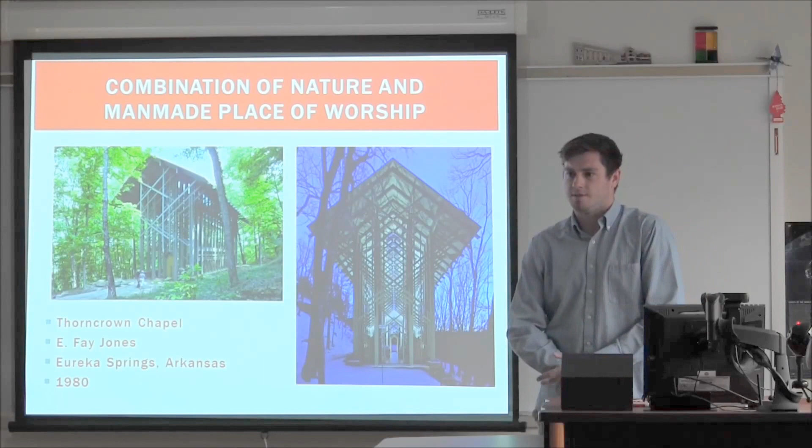For my modern adaptation on an ancient sacred space, I was really interested in the Parthenon in Athens, Greece. I wrote a paper on this before and learned a lot about it. I was impressed with how the space is also a combination of the beauty of nature and a temple, but maybe not intentionally. This is just a large, impressive temple, and I wanted to make a modernized version that was more this century, and I wanted to include sustainability with it too.

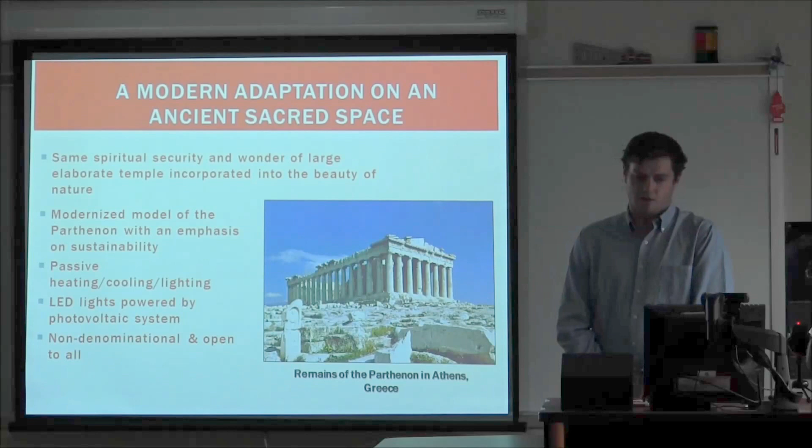So I included passive heating, cooling, and lighting, and there would also be an LED-powered photovoltaic system, or LED lights for nighttime, or when it's not so sunny and the passive heating won't work. Those would be powered by a PV system located on the roof.

They really focused on the golden ratio, which they called the number phi, 1.618. So all of the widths to the heights, everything - that's the ratio of the width to the height of the whole thing, and even down into the details, like the space between each of those little columns, everything seems to follow this ratio. They were really very particular and exact, which is impressive for the time period.

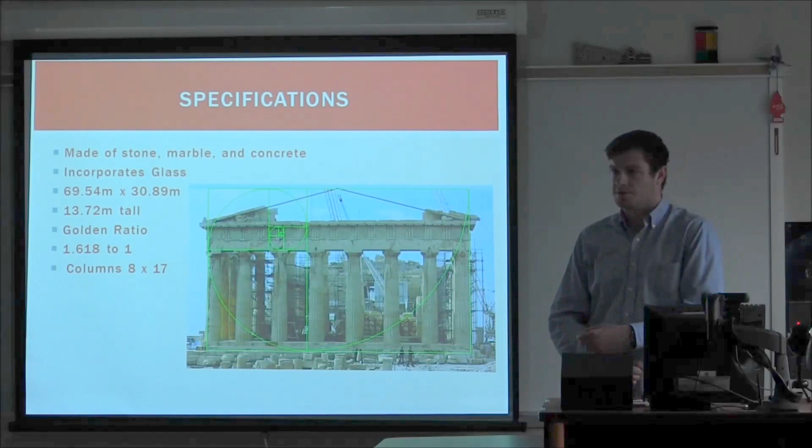They also went by a strict rule with the columns of the building. So this is the width of it, you would see 8 columns, and down the stretch would be 17, which the corner columns share - it's the 8th and the 17th.

The Parthenon is also located on this plateau, which I think is what really incorporated it into nature and the beauty around it. But I guess the purpose for that was mostly protection. So it was raised, and the Parthenon was located in the Acropolis, which literally translates as high city.

There were other structures within there for the people of Athens to use. It would also serve as protection - if they were being invaded or thought they were being attacked, the towns surrounding the Acropolis would all move up, and they could block themselves away up in the Acropolis.

Also, the purpose for it being raised, I believe, is it's a place of worship. There are temples and statues and many buildings dedicated to the gods, and when an area is raised, it's closer to the heavens. So for this new sacred space, I wanted to keep it elevated for the same purpose - closer to the heavens, and also incorporated into nature, keeping it nice in the area it's in, and really have it stand out and be something significant.

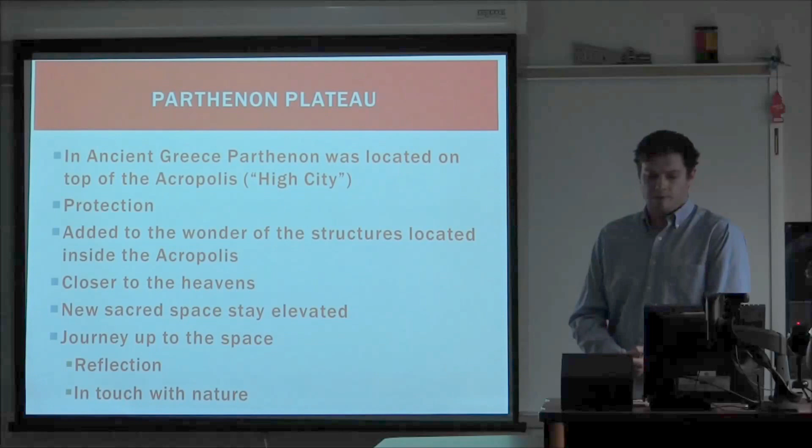Also, you see my structure - there's also, to get up to it, there'd be a journey to the space, which would really provide for, I think, getting in touch with nature on the way to your destination, and would maybe provide some time for meditation and reflection.

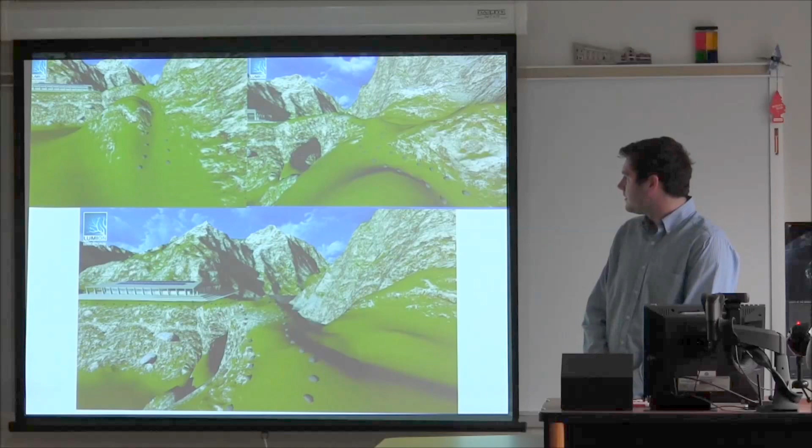So here's the path - over inside you can see the design of the sacred space I created. There would be a lined path sort of up into the mountains to get to the destination.

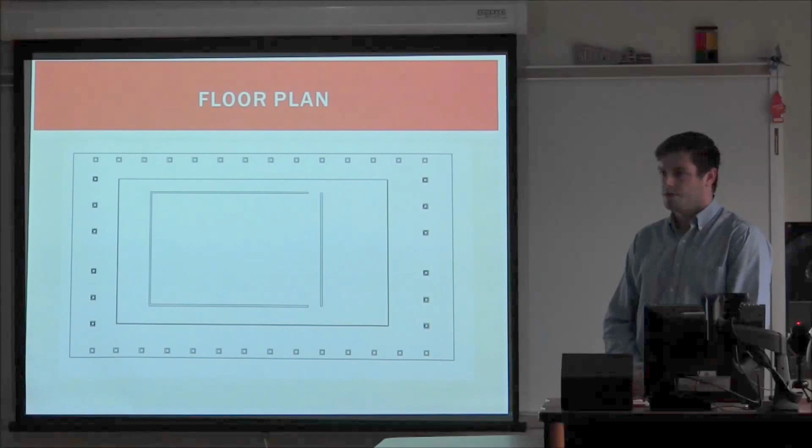And then here's a floor plan of the space itself. This outer box, or the middle box, would be like a glass wall curtain, which would allow you to be either outside under the overhanging roof or inside there if you wanted to, depending on your wants and needs. So the light would easily access that place, but you'd still be inside, sort of.

And then there would be another room inside for more, I guess, if you wanted to keep yourself focused and really wanted to focus on what you wanted to - since it's non-denominational, so if you wanted to pray or just meditate or whatever you want. And that's how the Parthenon actually was. They had separate rooms inside, sort of similar to that for different areas, with statues in different locations.

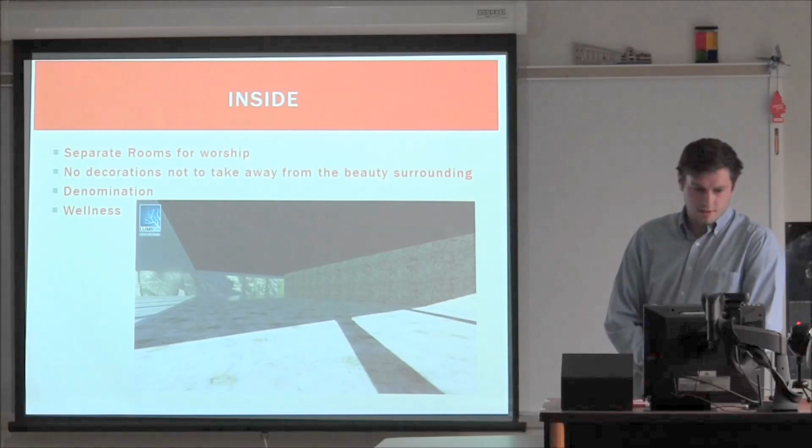So here's sort of the inside. You could be inside and still see out through the glass and appreciate the area around it. So this would be, if in the winter it was too cold to actually be outside of the area, you could go inside the sliding glass curtain and then be protected from the elements, but still be able to appreciate nature. There's not much decoration, like statues and stuff, as the Parthenon would have, because as I said, it would be open to all, and just a place to incorporate wellness.

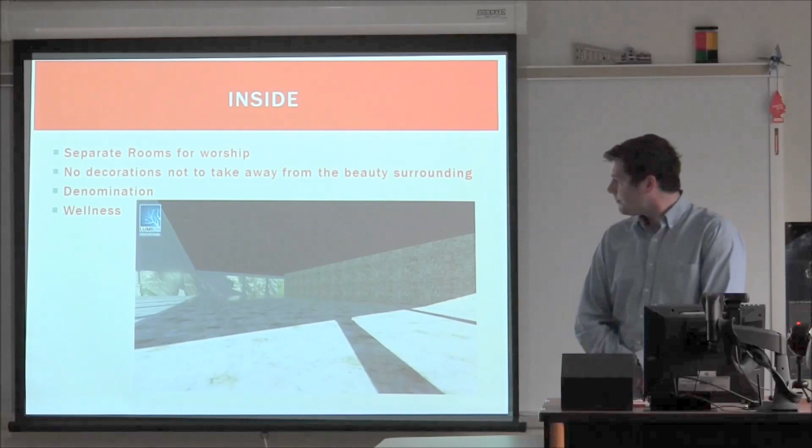And there would also be an outdoor area past the building, also lined, that you could go to and really go to the top of this cliff and appreciate the area around it.

And that's it. Any questions? Leave a picture up.

Do you have a location in mind for this, or did you just figure on top of a cliff? I kind of just made what I could and tried to make it look nice.

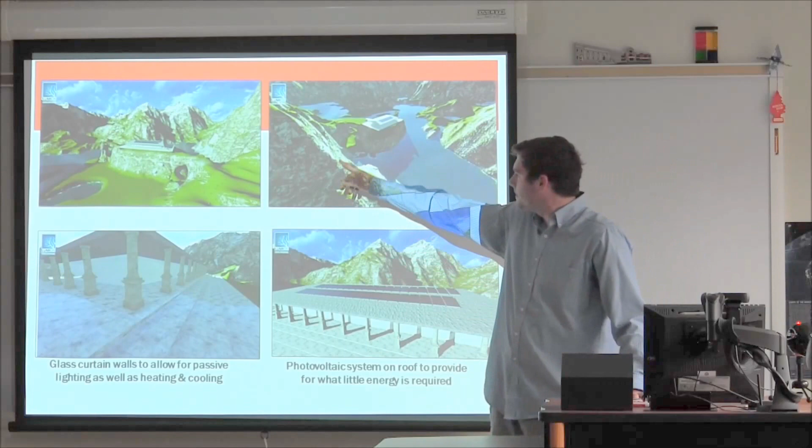Just curious, because I was also going to ask about the grass, the part on the inside where you have the ground exposed. You know what I'm talking about? No? Did you have an area where after you go inside there's ground exposed? No? Okay, sorry, my bad, scratch it.

Yes. So what was your inspiration for coming up with this design? Like I said, the Thorncrown Chapel was something I thought about a lot.

I like the idea of a glass chapel where you can see outside while still being protected from the elements. I'm also really interested in ancient Greece and the Parthenon, so I combined those two and tried to make it impressive, like the Parthenon, a large building.

It also reminds me of a Chinese pavilion, in the way that Chinese pavilions were designed just to put a roof over your head in a beautiful place so you could contemplate what was there, even though using kind of other proportions.

And you think about national parks and how people go to a lookout place, kind of a location where they go to contemplate nature. You could almost see it having that kind of use.

I mean, that sounds a little more recreational, but people do go to contemplate nature for the kind of spiritual effect it has on them. So it could have that kind of function too, close to a national park or in some kind of scenic area.

Did you create the mountains in the program, or were you able to? Yeah, so the mountains, all of this area, like the water surrounding it, not those mountains, but a pretty wide radius around the building, I did create.

Wondering about accessibility, just for like a day trip, with the landscape, how do you get there, I guess, is the question. I didn't really consider that, I'm not proposing this for a specific place, it's more hypothetical, so it would depend on where the location was.

I was just curious, did you think about where it would sit before you designed it, or did you decide to build it and pick materials based on that? A lot of times architects like to consider local materials and reuse, so how much of that would have to be hauled up?

Yeah, true. No, I mostly, when thinking of materials, just thought of trying to make it model as closely to the Parthenon as I could in that regard, but more modernized.

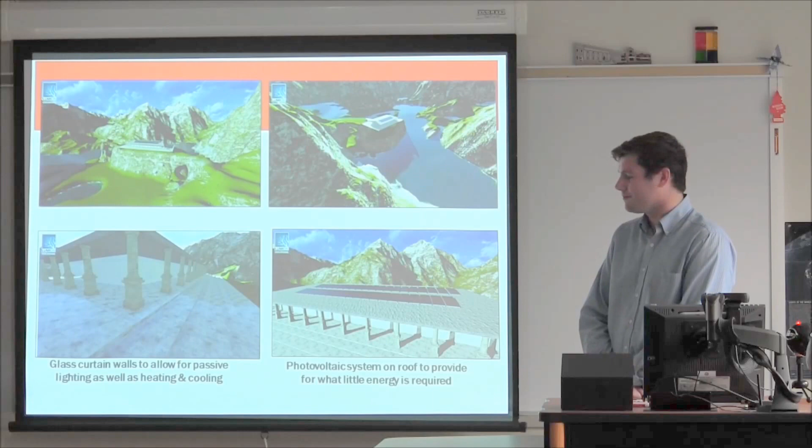Could you go back to your floor plan? Yeah, of course. I recognize that from the Parthenon, I understand what you're trying to do, that you don't want anything like a statue or an idol, so that it's non-denominational, but you might consider something so that it isn't cell-like if it's closed off.

It could be water, or if you have a skylight, it could be a kind of planter that is a focal point for meditation, like a rock garden or something. Yeah, a rock garden, even like a Zen type garden where nobody has to maintain it.

Right, but just so it isn't like a cell, it isn't just a box since everything else is open. And the other thing is, it's a nice design, it could be scaled down for different locations, because it's basically a viewing pavilion.